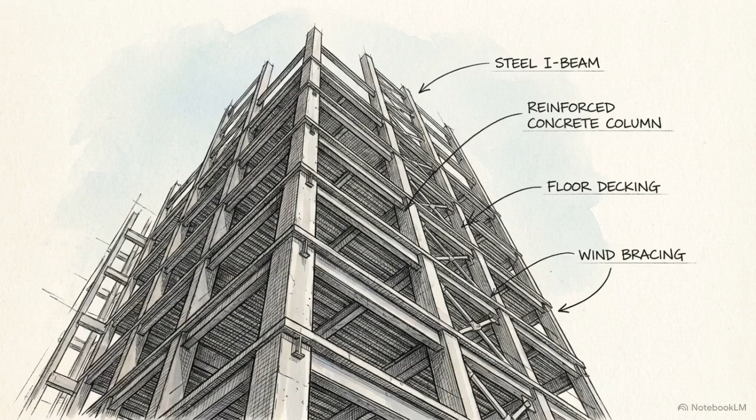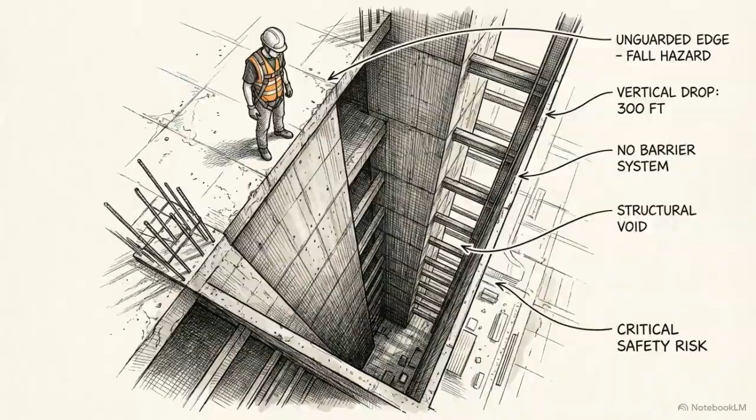When safety practitioners assess a construction site, the instinct is to look up. Extreme heights draw our attention because the potential for a catastrophic fall is obvious. But to understand the true distribution of risk, we must examine the data at ground level, starting with a baseline height of exactly 2 meters.

At lower altitudes, workers frequently skip safety precautions. Complacency and a false sense of security lead to a high volume of severe injuries that could have been entirely prevented. Vertical distance is only one component of the risk matrix.

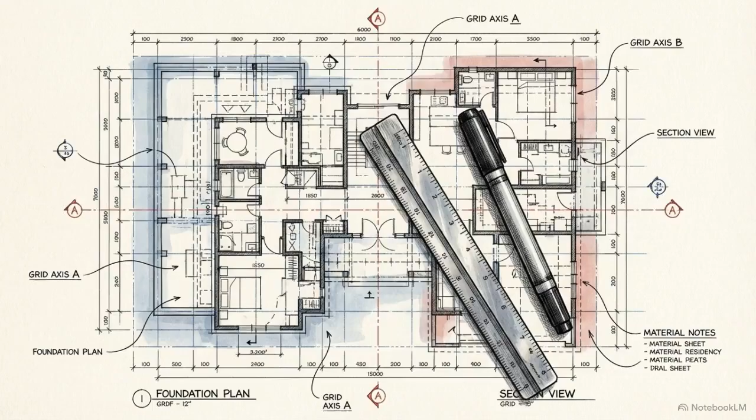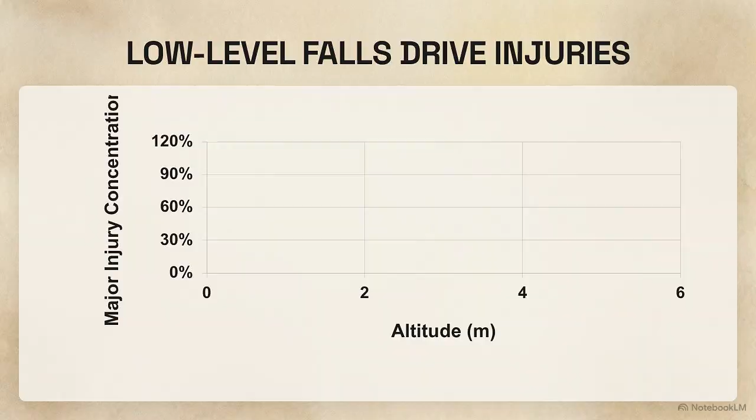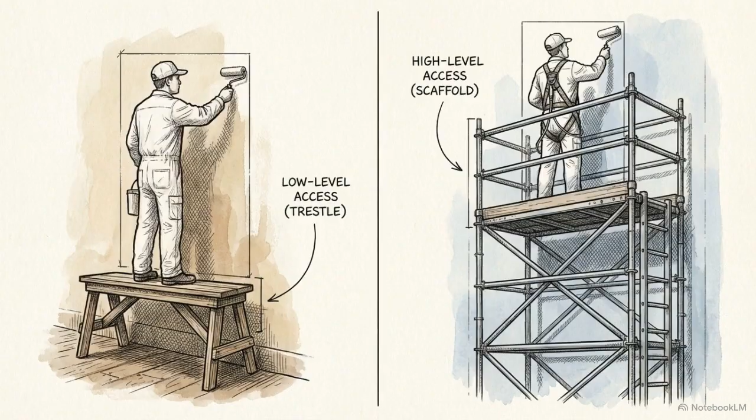The danger of a fall is multiplied by extrinsic variables, such as the sudden failure of fragile roofing materials or unexpected changes in weather conditions. Severe risk at height does not scale in a straight, linear line with altitude. Recognizing this statistical anomaly requires site managers to apply the exact same rigorous safety standards to a low-level trestle as they would to the top tier of a tower scaffold.

The Working at Height Regulations 2005, or WAHR, removes any ambiguity about what constitutes an elevation risk. Under the law, work at height is defined as work in any place, above, at, or below ground level, where a person could be injured falling.

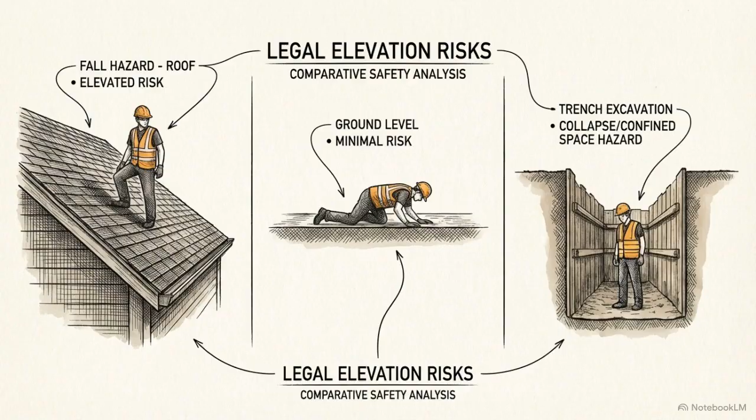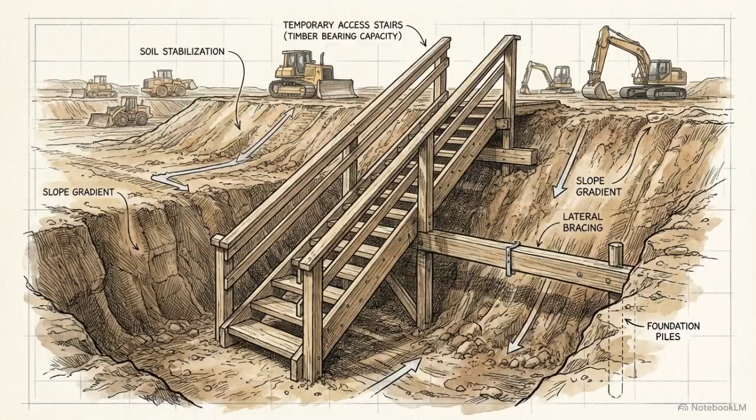This means a worker standing entirely flat-footed on the ground is legally working at height if positioned adjacent to an open, unprotected excavation trench. Furthermore, the regulations strictly stipulate that the access and egress routes leading to these working positions are equally classified as work at height and require identical risk assessments.

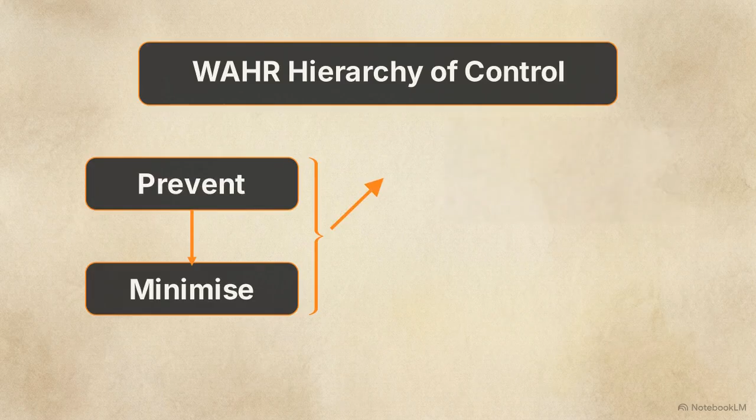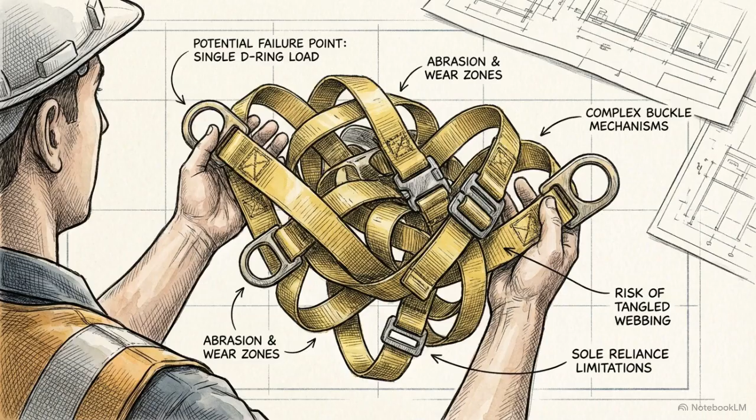Within the prevent and minimize tiers, there is a strict internal rule. Collective protection, methods that secure everyone in the area without relying on individual action, must be exhausted before personal protective equipment is even considered. A site manager cannot simply hand out personal fall arrest harnesses. Doing so requires documented proof to an inspector that engineering a collective preventative measure was entirely unachievable.

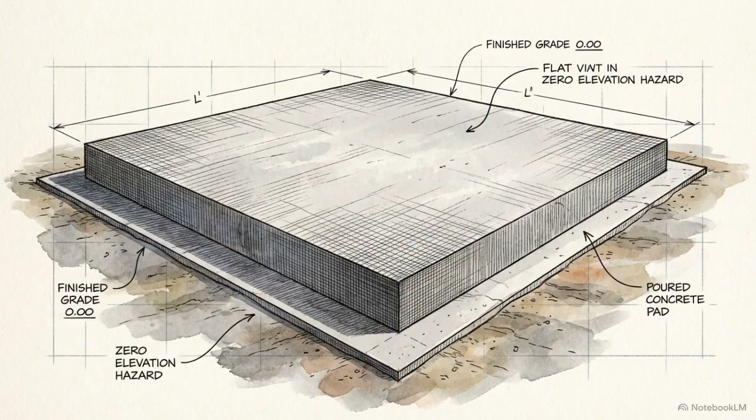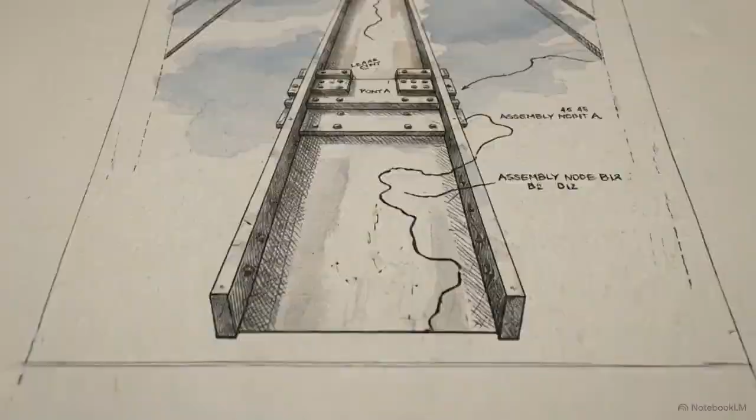Step 1 of the hierarchy is avoidance. The optimal control measure is to eliminate the elevation hazard entirely by engineering the work at height out of the project during the design stage. We see this in practice when contractors assemble complex, heavy steelwork at ground level and crane the completed structure into place, or when maintenance teams utilize ladderless extension poles to clean windows from the pavement.

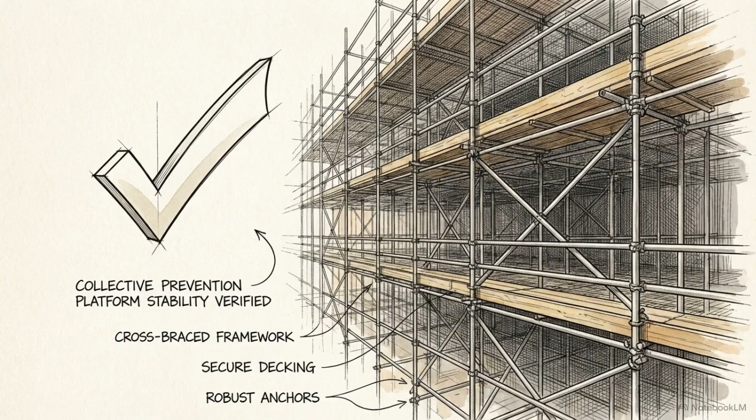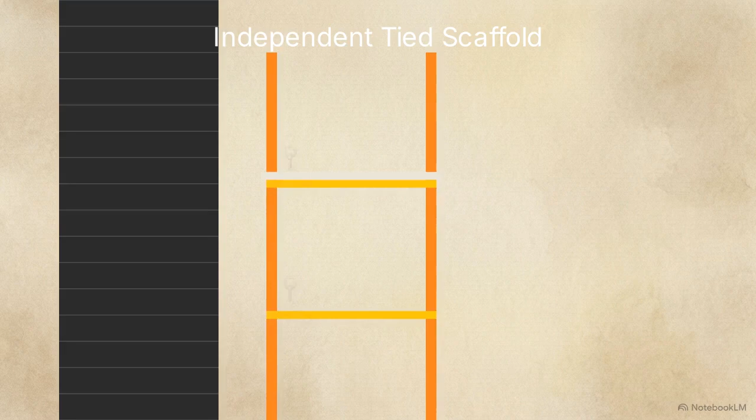When avoidance is impossible, we drop to step 2, prevent falls, specifically using collective measures. This requires the construction of stable working platforms. This diagram illustrates an independent tied scaffold. It is built using 2 parallel rows of vertical tubes, known as standards, which support the deck. Because it stands independently from the building face, it relies heavily on precisely spaced anchor ties drilled directly into the structure to maintain stability.

By contrast, a put-log scaffold eliminates the inner row of standards. Instead, it uses flattened horizontal tubes, the put-logs, which are lodged directly into the mortar joints of the brickwork to support the inner edge of the working platform.

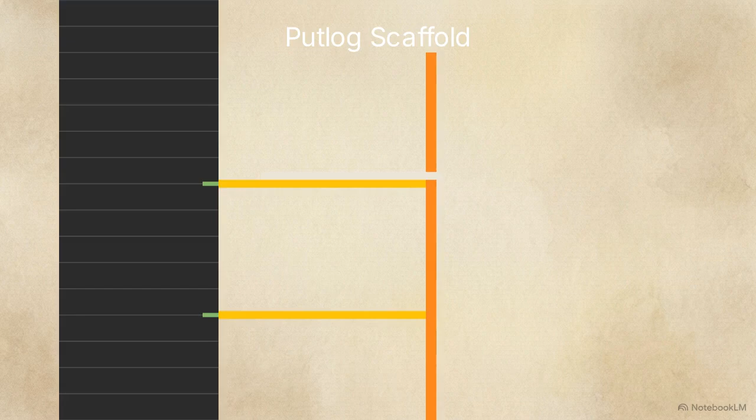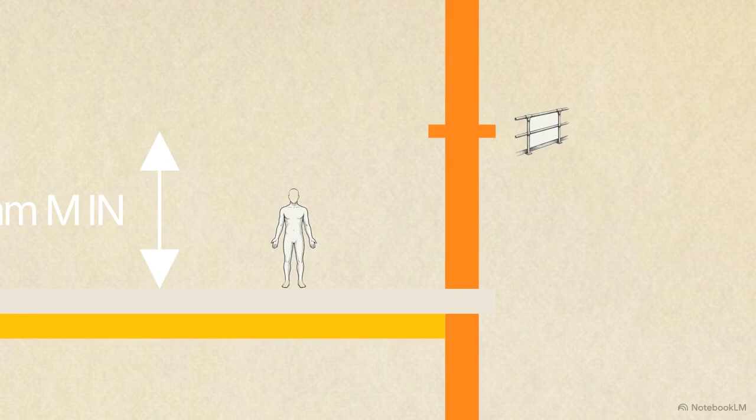Regardless of the scaffold type, edge protection regulations are exacting. A compliant platform requires a main guardrail at a minimum height of 950 millimeters, an intermediate rail to close the gap, and solid toe boards at least 150 millimeters high.

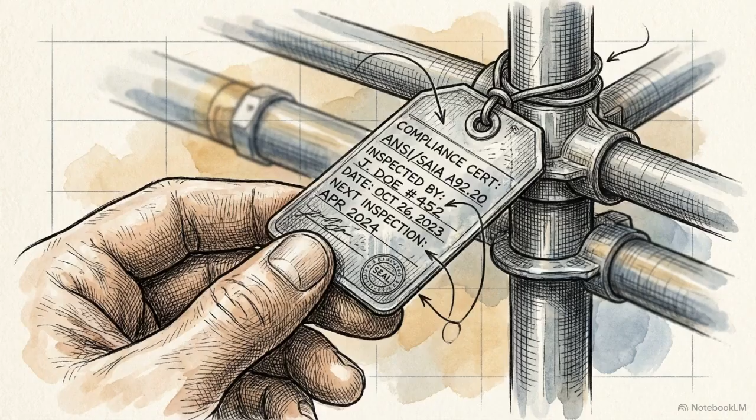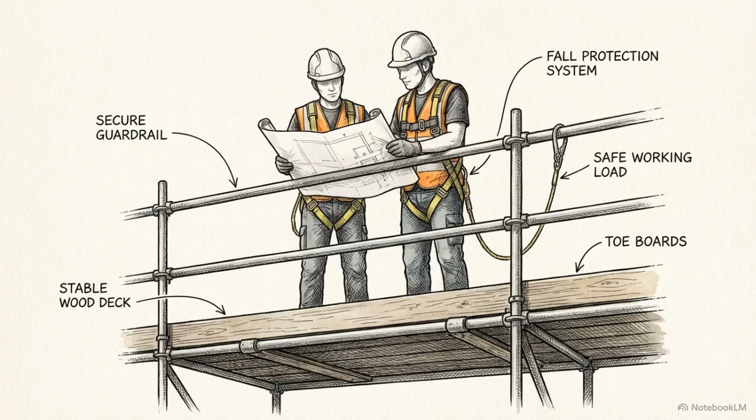These temporary structures are highly regulated and must comply with exact structural specifications, specifically BS EN 12811-1 and TG20:13, which is the UK industry's technical guidance for tube and fitting scaffolding. A fully compliant scaffold physically engineers the risk of a fall out of the environment. It delivers a safe place of work, fulfilling the legal mandate for collective prevention.

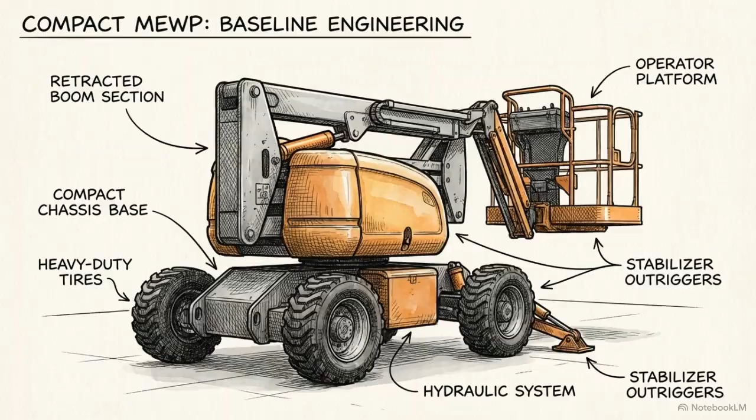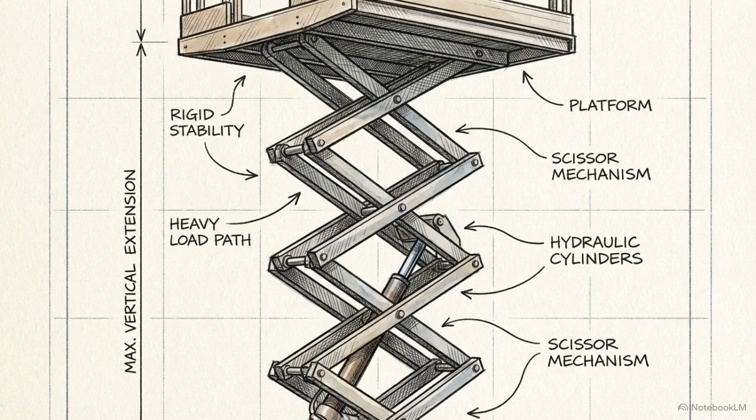When static scaffolding is not viable, site managers turn to mobile elevating work platforms, or MEWPs. These maintain the standard of collective prevention while honoring mobility. MEWPs come in distinct variations. Scissor lifts provide a highly stable, vertically operating platform. Articulated telescopic booms, on the other hand, use a jointed arm to deliver height, extensive lateral reach, and platform maneuverability.

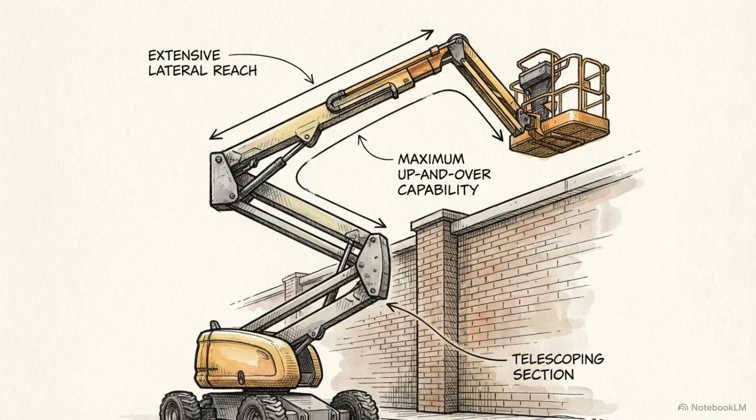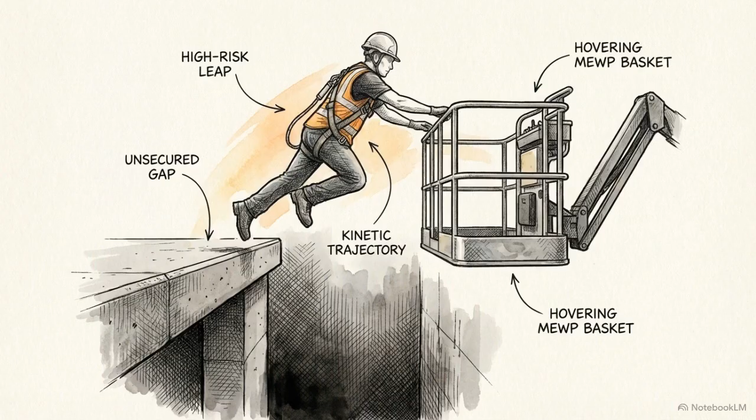MEWPs also have strict environmental operating limits. Manufacturers generally prohibit operating these platforms in wind speeds exceeding 28 miles per hour, as lateral force can easily overturn the extended structure. Operators must also avoid any shock loading. Shock loading is a sudden, destabilizing force applied to the platform equipment, typically caused by erratic, jerky control movements or by an operator dangerously jumping from an adjacent structure back into the basket.

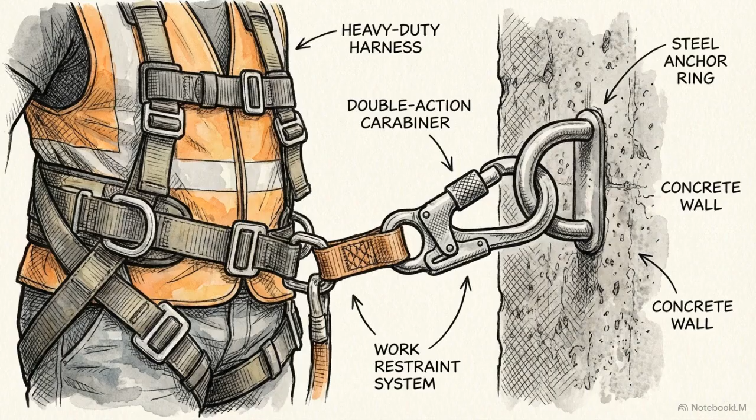If collective prevention via platforms or MEWPs cannot be achieved, we move to step 3 of the hierarchy: prevent falls using personal protection. The primary tool here is a work restraint system.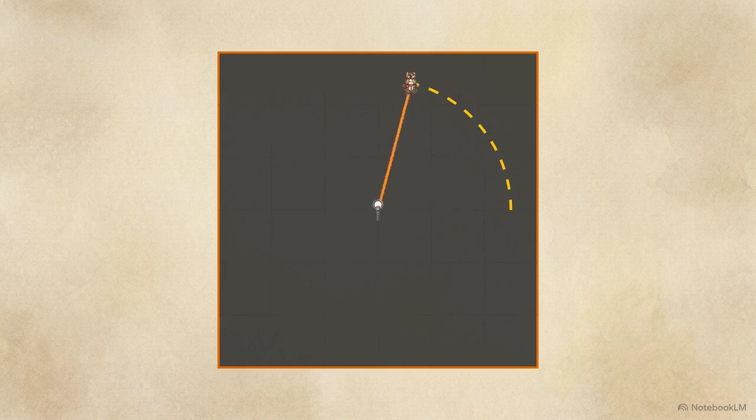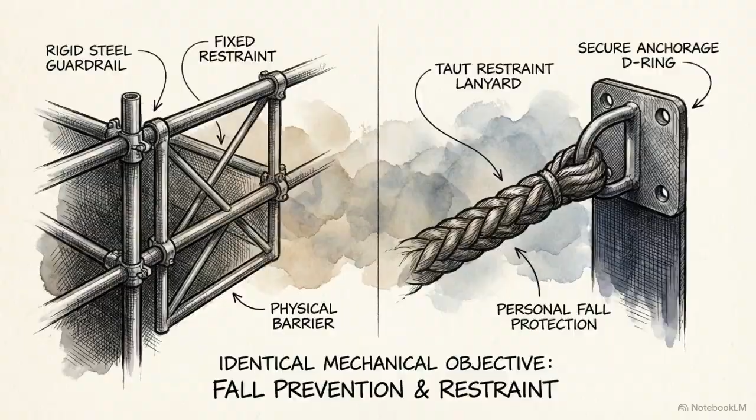This diagram shows the geometry of work restraint. The lanyard connects the worker's harness to a fixed anchor point. Its length is measured precisely so the worker is physically prevented from ever reaching the unprotected edge of the roof. The mechanical application changes, but the objective remains identical to scaffolding: keeping the worker confined within a defined geometric boundary.

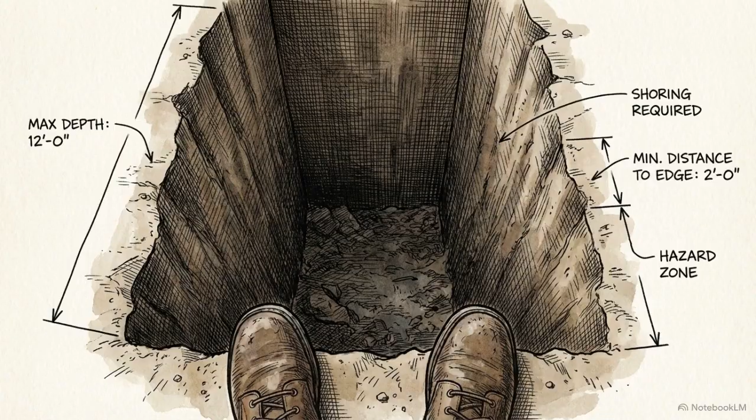When prevention measures are exhausted, the hierarchy forces us to step 4: minimize distance and consequences. If you cannot prevent the fall, the system must be engineered to catch the worker.

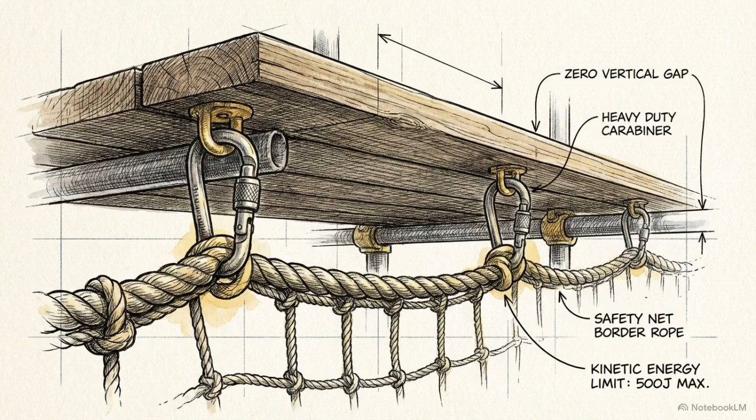Safety nets are the collective standard for this tier. Compliant with BS EN 1263-1, they must be erected by competent riggers and installed as close to the platform as physically possible to limit the kinetic energy of the drop.

Alternatively, inflatable airbags provide rapid deployment directly beneath the work area. They deliver a soft landing with minimal rebound, completely isolating the falling worker from the solid ground below.

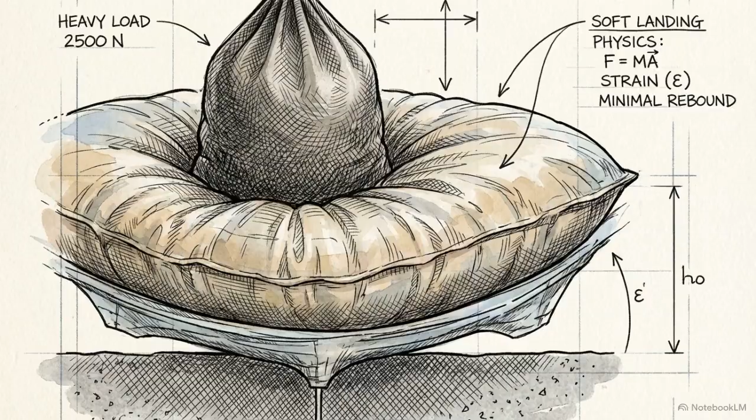Moving further down brings us to step 5, minimize using personal protection. This is the domain of fall arrest harnesses.

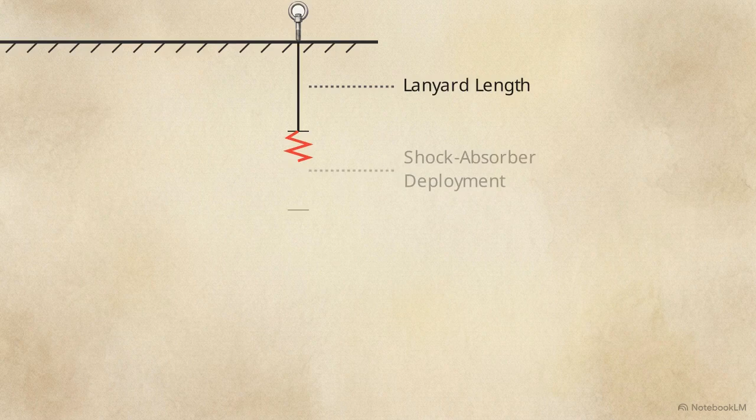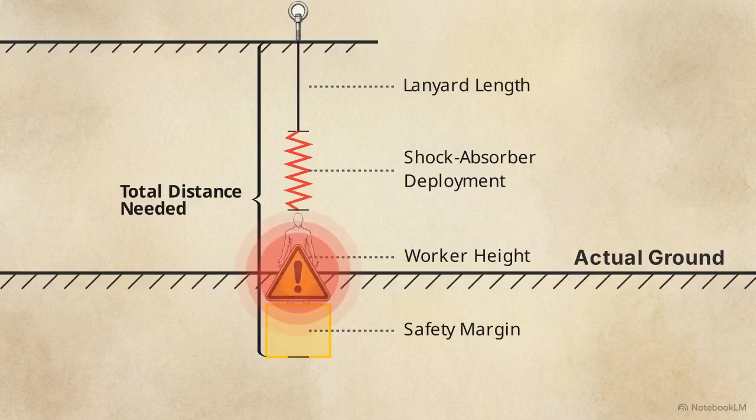This vertical diagram details the exact mathematics required for fall arrest. You must calculate the length of the lanyard, plus the shock absorber deployment distance, plus the worker's height, plus a safety margin. If this combined total exceeds the distance to the ground, the system will fail to prevent a fatal impact. Finally, at step 6, we reach ladders.

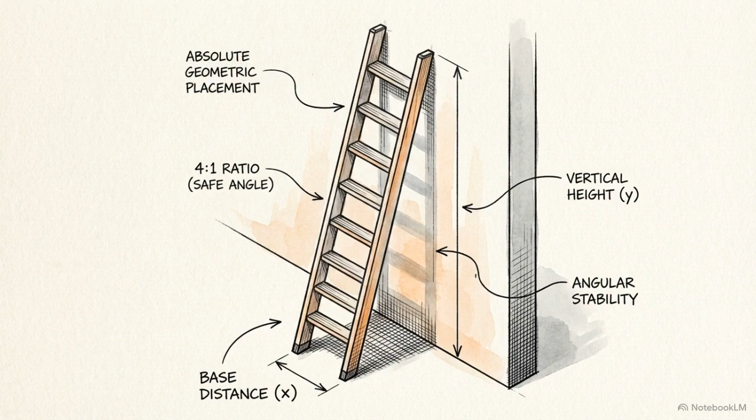The WAHR classifies ladders strictly as a last resort, legally permissible only for light, short-duration work where establishing a safer platform is unjustified. When a ladder is used, it must adhere to an absolute geometric rule.

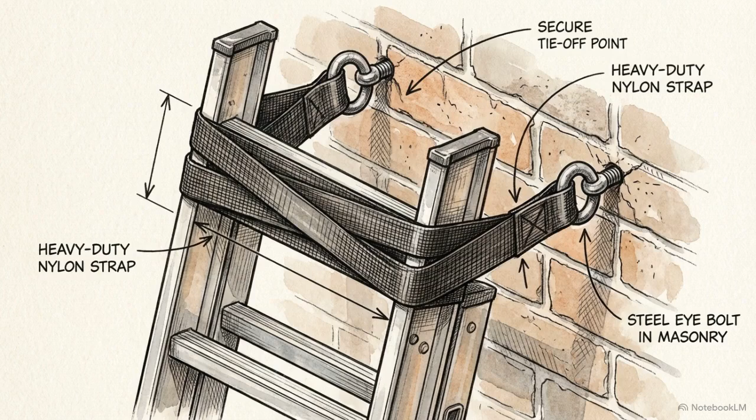For every 4 units of vertical height, the base must be placed 1 unit away from the wall. The ladder must then be securely tied off at the top or footed by a second worker at the base.

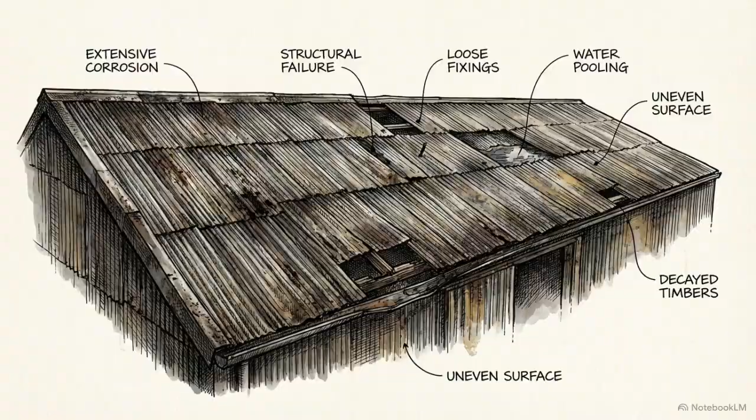Relying on fall arrest systems or ladders is an admission of failure. It places the worker at the edge of allowable legal risk. The hazard assessment must extend beyond the engineered platform to the surface of the structure itself.

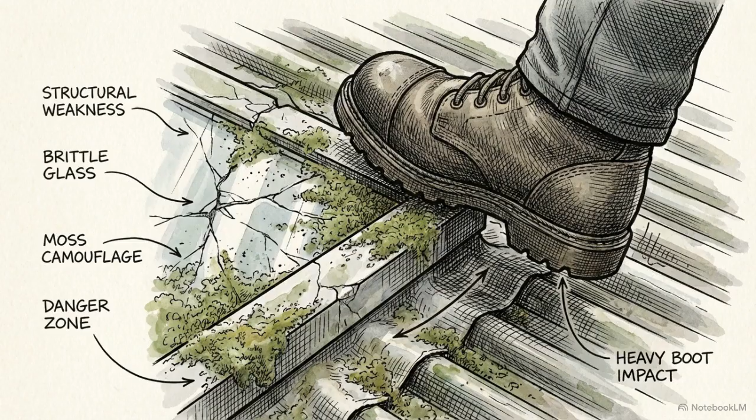Fragile roofing materials act as massive risk multipliers. Lightweight asbestos cement or brittle perspex roof lights are rarely designed to bear human weight. Years of environmental weathering, dirt, and moss growth camouflage these critical weak spots, making them indistinguishable from solid roofing.

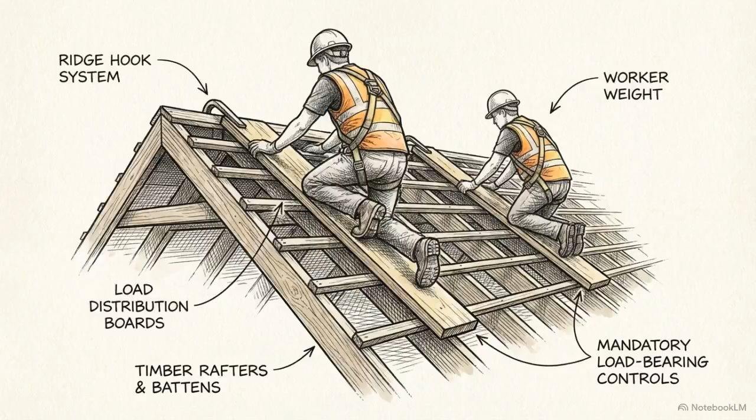Navigating these surfaces requires mandatory controls: deploying adequately supported crawling boards to distribute weight, and erecting prominent warning signage at all approach points. The secondary hazard of working at height is the dropping payload.

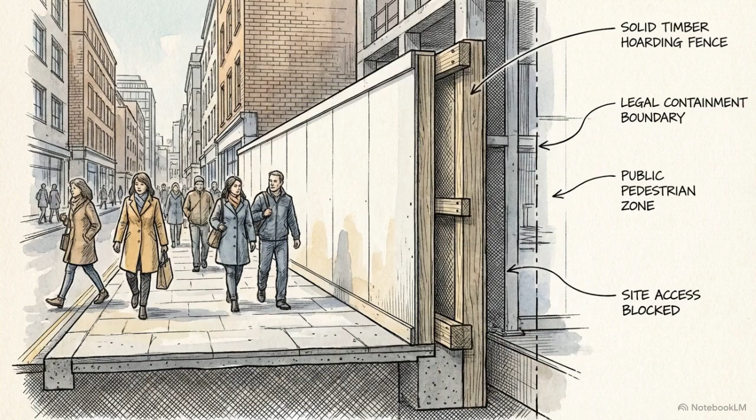Site managers have a legal duty to protect third parties, contractors, and the general public from objects falling from the work zone. This containment starts at the platform level.

Scaffolds must be fitted with solid brick guards and fine debris netting to trap loose materials, grit, and tools before they can breach the edge.

At ground level, the Construction Head Protection Regulations 1989 dictate strict enforcement. Hard hat zones must be clearly designated and mandatory for all workers and visitors exposed to overhead risks.

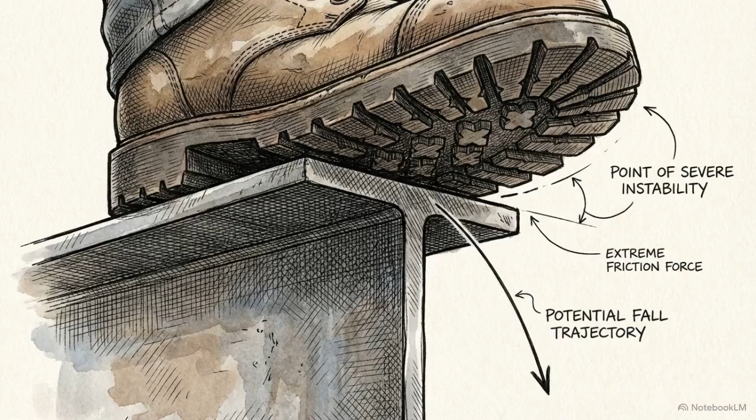A system of work at height is legally incomplete if it only focuses on the worker's balance. It must contain the devastating kinetic energy of dropped objects.

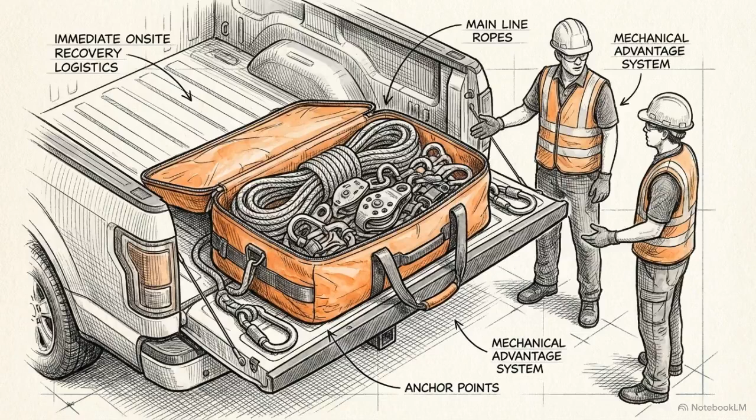When preparing for a NEBOSH assessment, one critical requirement is frequently overlooked by candidates: the emergency rescue plan. A site cannot legally rely on simply calling the emergency services if a worker falls. Immediate, pre-planned recovery equipment and trained personnel must be stationed on site before the work begins.

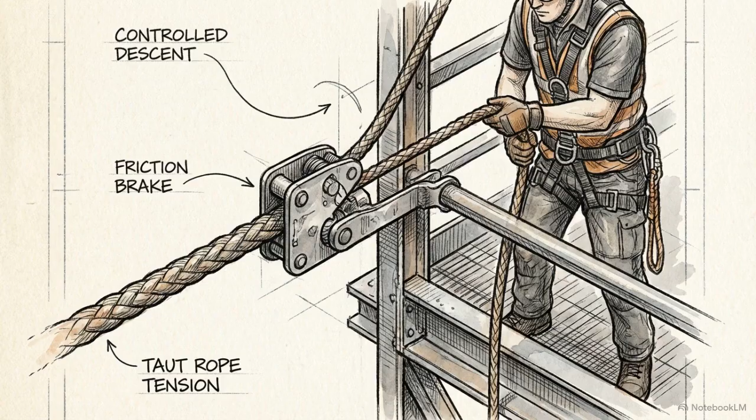Rescue methodology dictates that lowering a remote casualty to the ground is always physically easier, faster, and safer than attempting to hoist them upward over an abrasive edge.

One of the most effective pre-planned strategies is the immediate deployment of an on-site MEWP to intercept the suspended casualty and bring them to safety.

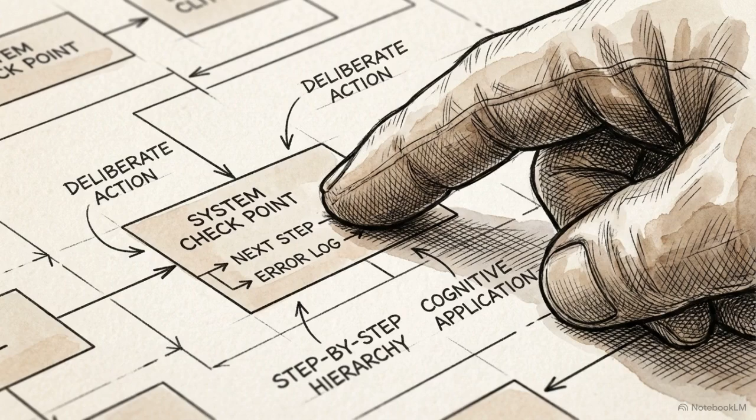For the NEBOSH examiner, competence is proven through strict sequencing. You must map the exact hazard, identify extrinsic multipliers like weather or roof fragility, and apply the WAHR hierarchy without skipping a single step. True mastery of Element 7 requires engineering a tripartite system: you prevent the worker's fall, you catch the dropped payload, and you guarantee an immediate rescue.